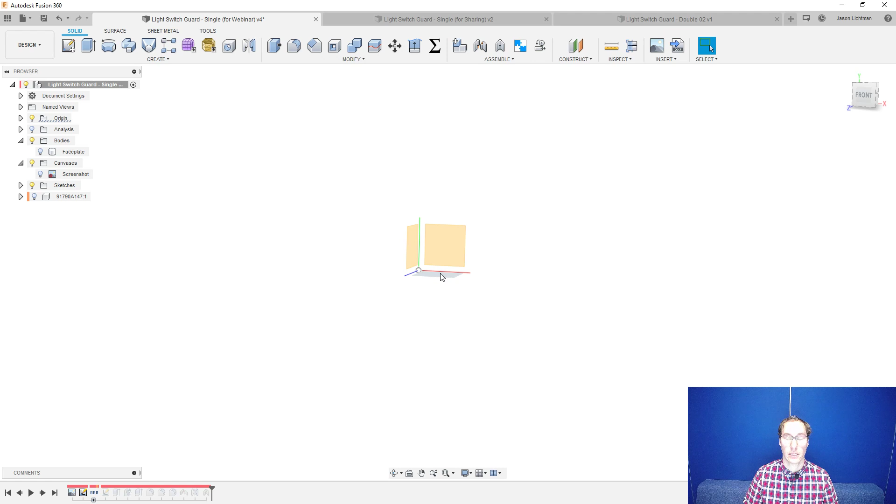We also here have planes. This one is the XY plane or the front plane. This one here is the YZ plane or the right plane. And this one here is the XZ or the top plane. We're going to go and pick one. In this case, I'm going to choose the front plane or that XY plane. I left click to select it and right click to create a new sketch.

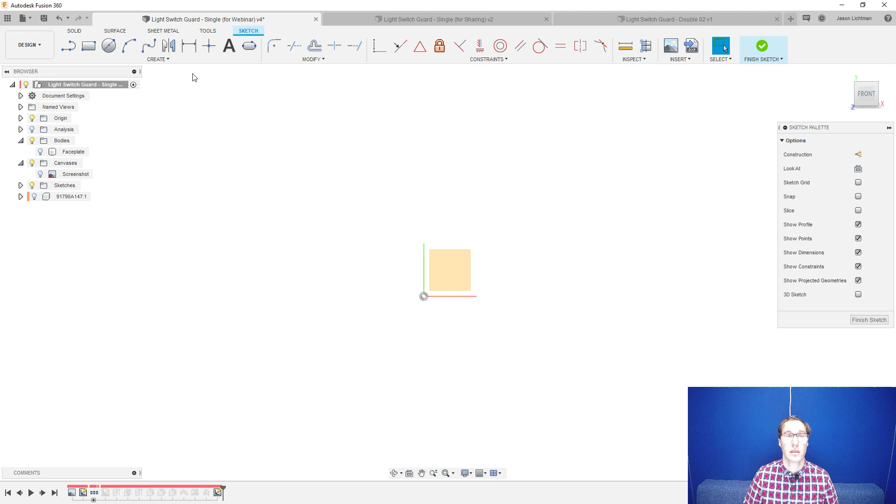Now that I'm in the sketch, I could see the sketch palette on the right-hand side, and I could see that I'm in the sketch tab up top. By the way, if you don't see this set of tabs like I see, keep in mind that you're probably not using the new user interface.

To turn on the new user interface, go to your preferences, under your name, Preferences, and the very bottom tab is going to say Preview, and turn on the UI Preview. After you restart Fusion 360, you should see what I see. I'm going to go and grab some different geometry to start with.

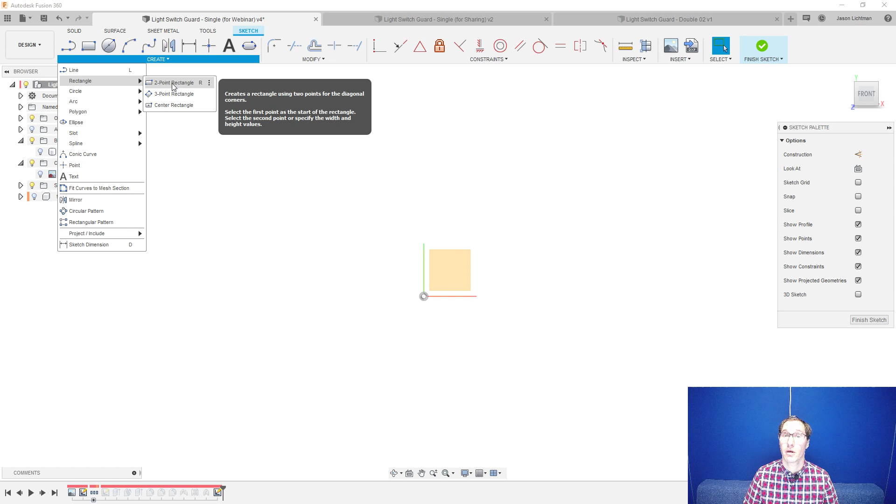Under Create, you could see that I could draw lines and rectangles and circles and arcs and a whole bunch of different shapes. In this case, we're going to start with a rectangle. I'm going to choose a 2-point rectangle. And if you're not familiar, the difference between the different rectangles are simply how you draw them. They're all just rectangles. I'm going to go and choose a 2-point rectangle and draw a quick rectangle.

I like to add center lines so I can make sure that everything is symmetric. So I'm going to go to Create, Line, and I'm going to draw a line from the origin up to the very center of the horizontal top line. And you'll notice that when I put my mouse near the very center, a blue triangle shows up. And that blue triangle is showing me that if I click here, it's going to add a constraint. And that constraint is going to be the same constraint I see up here called midpoint. It's going to lock into the center of that line.

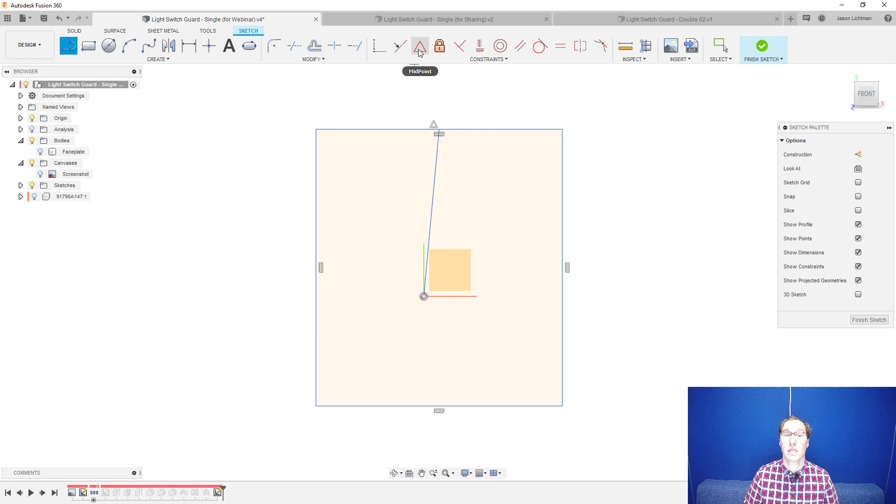Let's go and do that again. I'm going to click the origin, and this time the very center of the right vertical line. And now we're going to go and add some more constraints to be able to make sure that everything is lined up correctly. I'm going to add a horizontal or vertical constraint to this line to make it vertical, and this one to make it horizontal. And now everything snaps and is centered. In fact, if I go and I grab my square, you'll see here that everything I do at this point is going to be symmetrical.

Now, if I hover my mouse over that square, you'll see that it breaks it up into two sections, the upper right quadrant and then the rest. And the reason is because this vertical line here and this horizontal line are breaking up my section. And in this case, I don't want it to do that. And for that, all I have to do is convert these lines into something called construction. And you'll see that right here in the sketch palette on the right-hand side under construction.

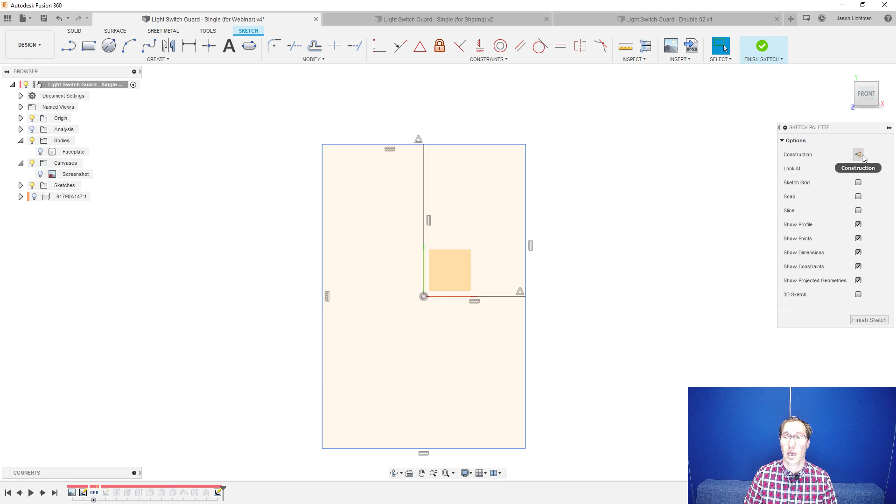So if I select that option and choose these different lines, it'll turn them into dotted lines that represent construction. And now when I move my mouse over this square, it's going to highlight the entire square and not separate it into two different sections. This is exactly what I wanted.

Let's go and do this one more time. We're going to create one more rectangle. This time I'm going to use a shortcut. The default shortcut for a rectangle is a letter R for rectangle. Very intuitive. We're going to click R for rectangle and draw another rectangle here. And this time, it actually made it into construction geometry automatically. I can actually double click on this rectangle, hit construction, and put it back into regular geometry.

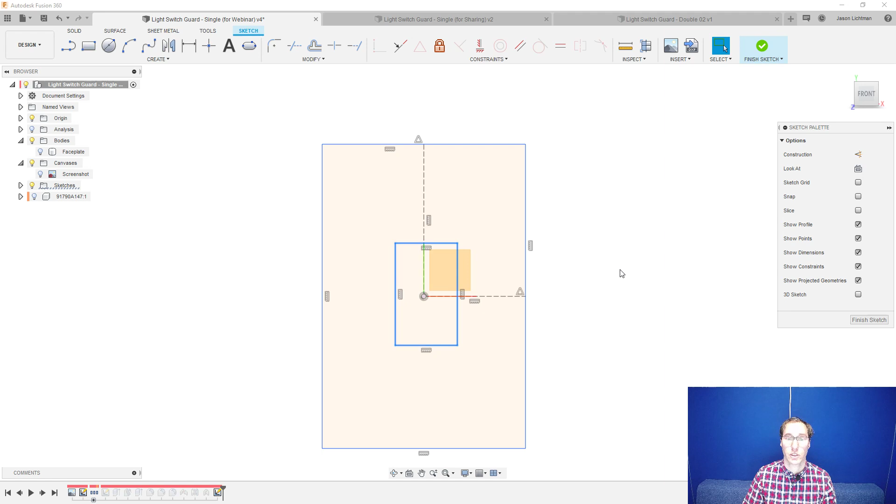That's what I wanted. Let's go and put some dimensions on this so far. We're going to go with a horizontal dimension of 79.75. And that's what I measured my actual light switch cover to be. We're going to also add a vertical dimension, and this one's going to be 116.75. Perfect.

And you'll notice that my rectangle went from blue colored to black, and the reason is because at this point I added enough dimensions and enough constraints to fully define the rectangle. The software doesn't have to think about, did I want this or did I want that? It knows exactly what I wanted because I fully defined it. That's the fancy word we use for it.

I'm going to do the same thing for the smaller rectangle. We'll go and add a dimension. Maybe we'll start with a vertical. This is going to be 24.75. And we'll also add a horizontal. This one is going to be 11 millimeters.

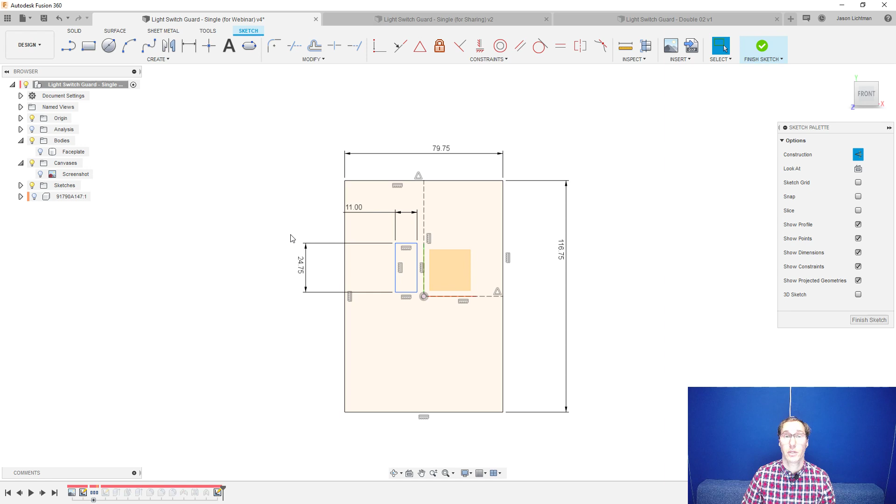And you'll notice that the rectangle, even though I put the dimensions on, is still blue. And it's because I didn't yet define everything about it. In this case, I didn't define the position. So I can go and move this rectangle wherever I'd like, including approximately in the middle here. And then we'll go and add another constraint to fully define it.

And this one we're going to use is called symmetry or symmetric. Under constraints, I can choose symmetry. And in this case, the order that you click very much matters. So let's go and make sure we get it in the right order. We're going to go and select any of the lines that I want to make symmetric, then the second one, and lastly, the line that's going to be in the center.

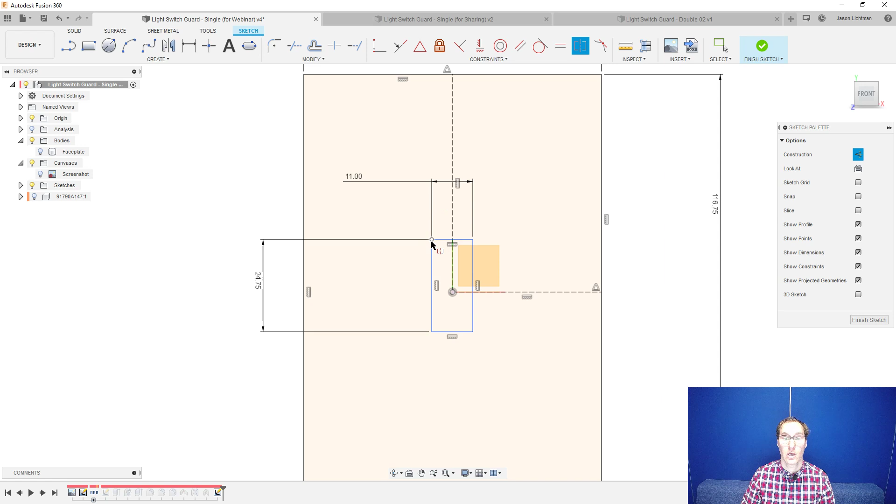So let's go and choose the left vertical, the right vertical, and then the center line. And off it went, and it not only snapped into place, but it also turned it black for fully defined. Let's go do this again for the horizontal, and now that's snapped as well.

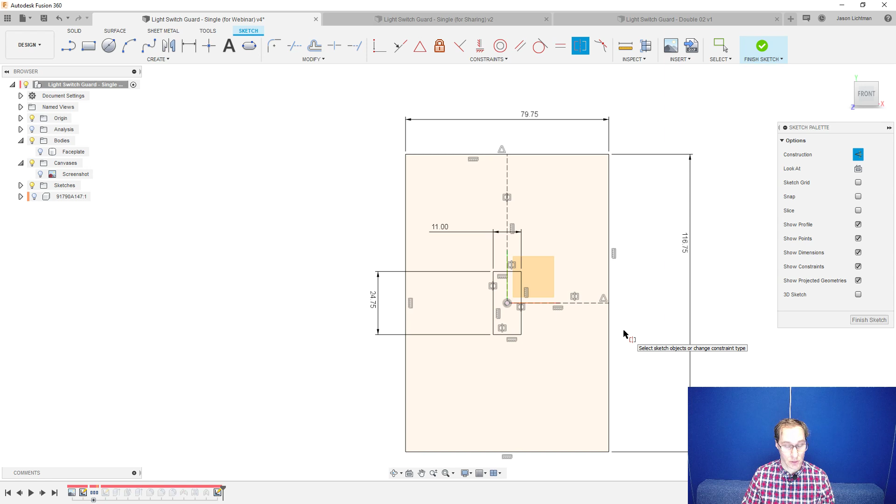There's only one more thing that I need here, and that's going to be the location of the screw holes, because I'm going to want my 3D printed part to fit with those same screws. So let's go and put those. For circles, we can use a shortcut C for circle, very intuitive, just like before. And I can go and draw a circle here, and we'll make that not construction. And then I'll go and add one more circle down below.

And actually, another thing I could do that'll make my life easier, let's go and delete this bottom circle, is I could actually go in and say create mirror, and I could choose an object that I want to mirror, and it'll automatically draw it and apply a symmetry constraint. So that's a little bit of a shortcut for any of you beginners out there. We're going to choose the object is going to be the circle, and then the mirror line is going to be this horizontal line, and we're going to say OK.

And as a result of applying that mirror command, now if I move the topmost circle, it'll move the bottom. And also if I change the size, it'll also change the bottom. So that's perfect. We're going to do that one more time. I'm going to draw another circle up top. We'll go and add my symmetry and mirror that as well. And now we're looking really good.

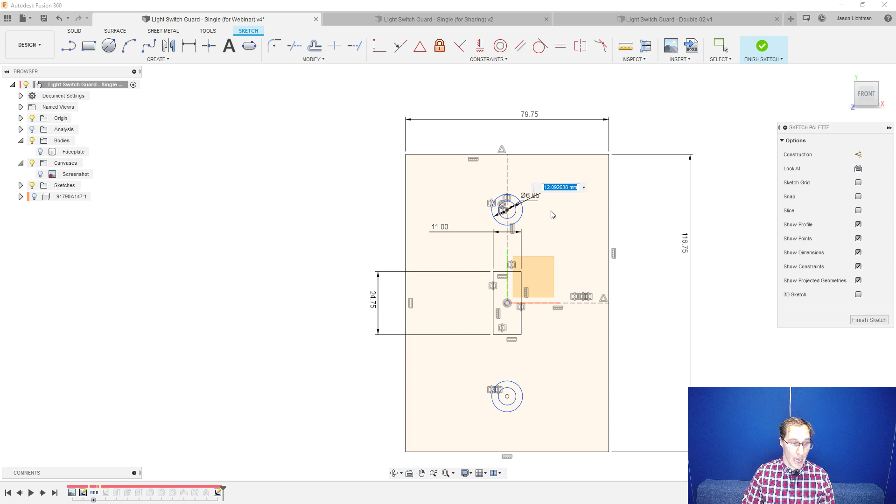Let's go and put some dimensions. We're going to make one of these, the bigger one, 6.85 millimeters, again from measuring my actual faceplate. And then the smaller is going to be a hole that's 4.25 millimeters. The only thing left to fully define this sketch and be able to move on to the next part of our design process is to make sure that I get the dimension between the holes correct. In this case, it's really simple. It's only 60 millimeters. So go and add that, type in 60, and now I'm good to go.

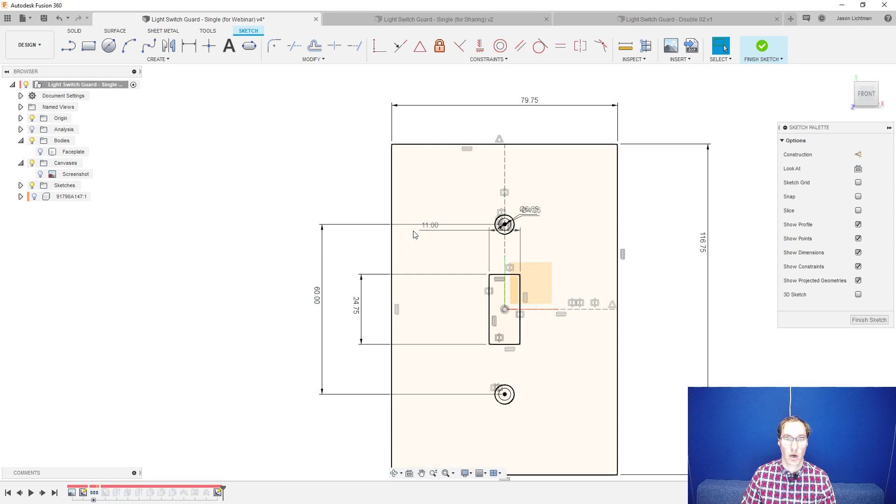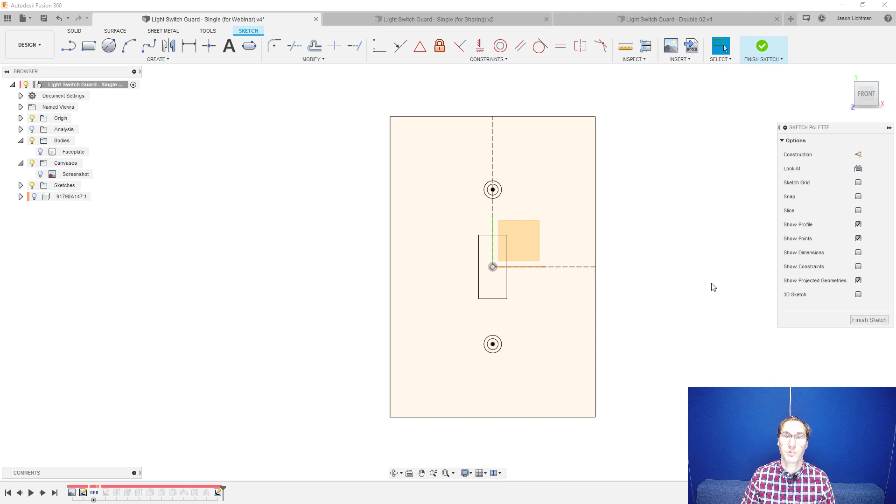If I move my dimensions out of the way or even hide the dimensions, now you can see exactly what I'd expect. And by the way, you can hide your dimensions and you can also hide your constraints. Both of the showing and hiding dimensions is actually new as of our update about a month ago, maybe 6 weeks ago, and the show constraints has been around for a little while, but now I'm seeing everything and it's looking really, really good. So let's move on to the next part where we design the actual guard. So we're going to go and finish this sketch, and we're going to go and create a new sketch on the same front plane, and now we'll go and design the really fun stuff.

To start off, we're going to want to go and project some geometry from the original sketch. And if you're not familiar with that term, let me just define it for you. The sketch that we created was sketch number 1. We're creating now sketch number 2. And although I can see sketch number 1 in the background, if I want to use geometry from that sketch, I do need to project it so that sketch number 2 looks at sketch number 1 for that particular geometry. And if I ever change sketch number 1, the geometry shown as projected in the second sketch will also update.

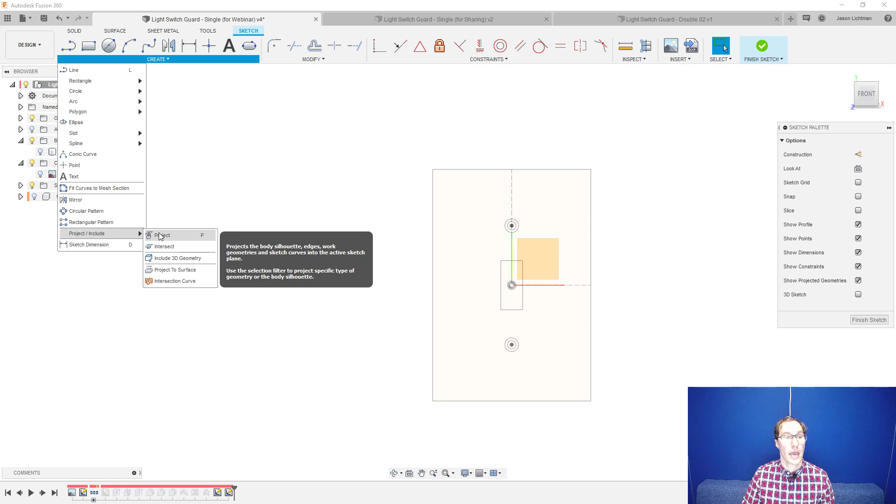For that, I can go to Create, Project, and then choose the Project feature, or I could just hit P for Project. I'm going to go and choose the larger of the two holes, the two circles, and say OK, and now we're good to go.

In fact, if I go and I hide that original sketch, you'll see at this point all I see are the two circles, the two projected circles, and they're magenta because they're projected. That makes it a little easier for me to see that they're projected. And so at this point, if I want to use the other sketch to keep it in the background, I can, but I don't need to.

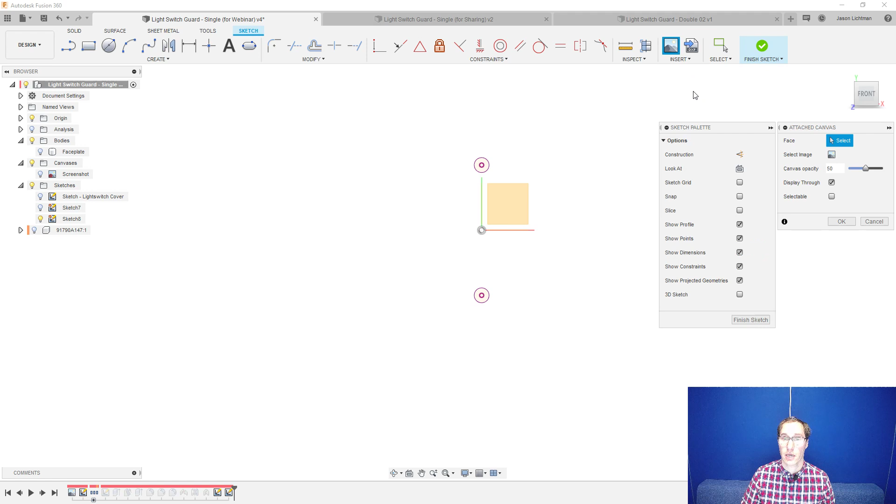It's really my choice. Also, what I could do to help me out is I could bring in an image, and we call those attached canvases. So let's go and bring in an attached canvas, and then we'll use that to trace our design to make it a little bit easier for us. So I'm going to go under Insert, an attached canvas. I'm going to choose the plane that I want to bring it in at, and I'm going to go and select the image itself from my computer.

We're going to go to the folder that I have ready to go, choose the screenshot, and as you can see, the image is not exactly the correct size. But we can fix that very easily here in Fusion. We're going to go and choose this screenshot on the left-hand side, under Canvases, and we can right-click and we could say, let's calibrate this image.

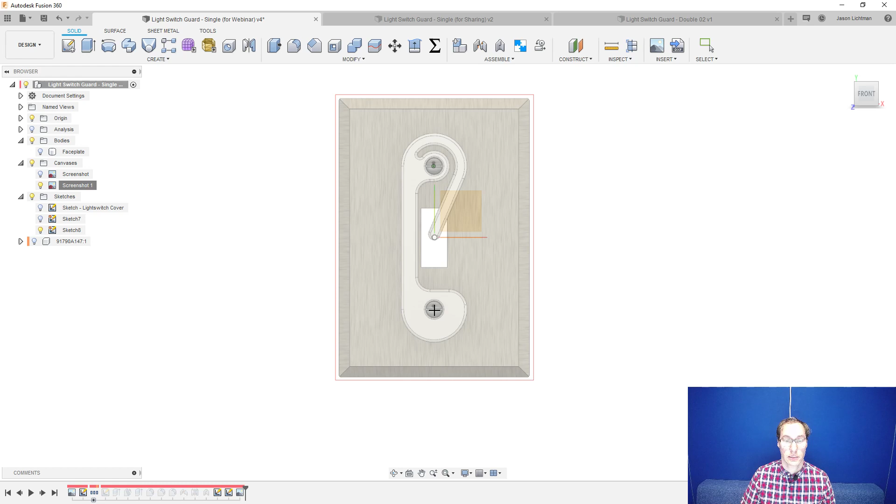And if you're not familiar with calibration, what we're going to do here is we could pick any 2 points on this image, and it'll allow us to override the dimension to whatever we want. So if we know already that the center of this screw hole to the center of this one is 60 millimeters, all I have to do is type in 60, and it'll automatically scale the image to the right size. And that's perfect. That's really helpful.

Now I can go and reposition this if I need to, but it already happens to be centered, so my life is a little bit easier. But if I did want to go and recenter it, I would right-click on the image, Edit Canvas, and then using these manipulators, manipulators is what I meant.

Got to make sure to put the right emphasis on the right syllable.

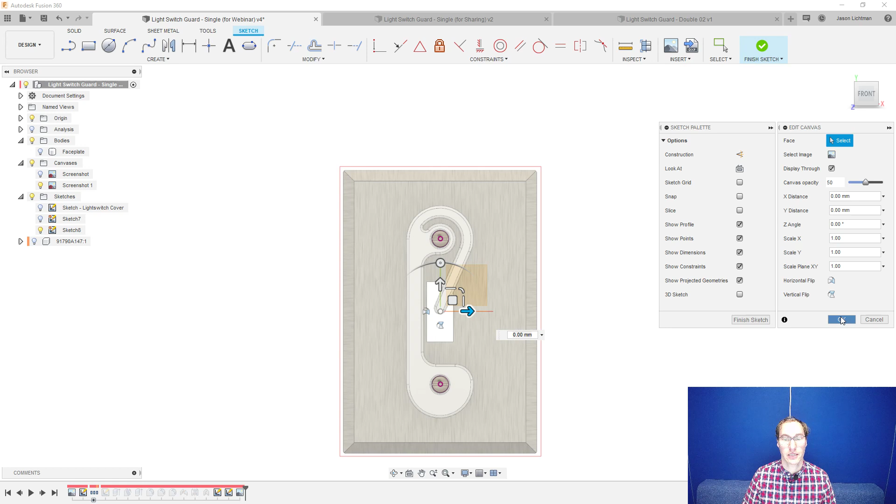But if I go and I orient this the way I want, then I'm set up and ready to go. So here I am. It's all set up. Let's go and draw. Now, we're going to go and reorder things just a little bit. I'm going to reorder my canvas slightly. And now when I go and I draw my sketch, I can actually see the canvas in the background. That'll make things easier for me.

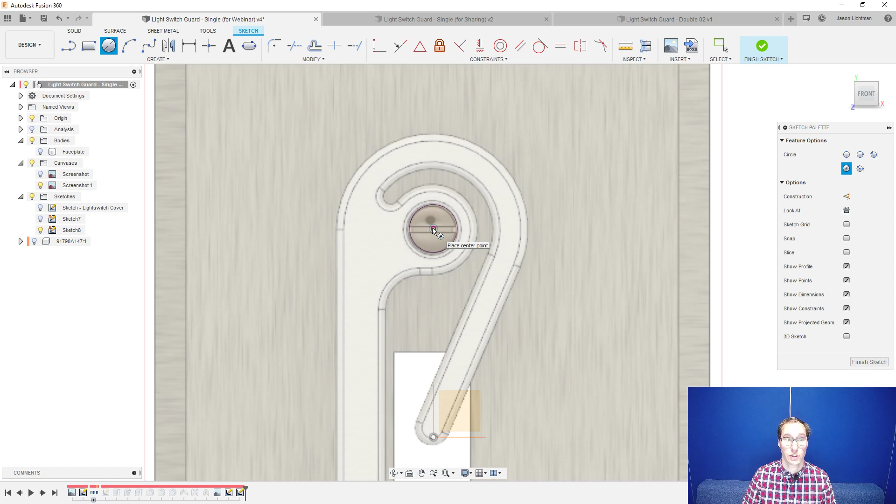Let's go and add some circles, because if I zoom in here, you could see that the majority of this design is actually circular. So I'm going to hit C for circle, click on the very center of the projected geometry, and I'm going to draw a circle approximately here. The exact dimension doesn't matter for now. We're going to go and do that again, and we're going to go and do that again.

Now I can go and put dimensions on this to be exactly what I want. So for example, if I want the thickness of this region from here to here to be, let's say 3 millimeters, we'll go and override that number, and it's looking good. Maybe I also want to define the thickness of the actual arm that's going to be bending. And keep in mind that this number is actually very important. This is going to define the flexibility of your part.

This is actually one of about 5 different things that'll all define the flexibility. And I will make sure at the end of this particular webinar, I'll cover what all 5 of those different variables are and how you could change them to suit your particular needs. But for now, this is one of them, and we're going to go and dimension between them, and I'm going to set this to be 5 millimeters.

Now at this point, my circles are still blue, they're not fully defined, and I can go and stretch this wherever I want, and as I do that, it's going to maintain 5 millimeters from this circle to this one, and maintain 3 from this to this one.

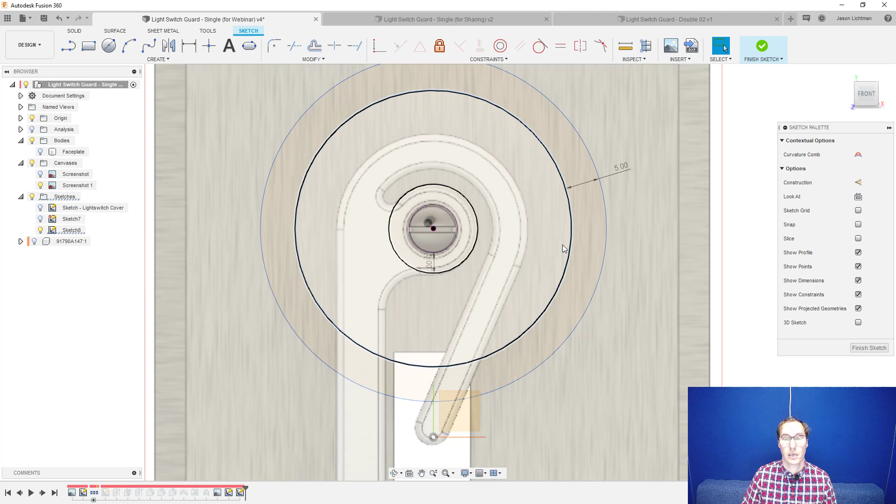In fact though, this one, the smaller, is fully black because it's fully defined, because we know where the screw hole is, we know what the offset is, it knows everything that it needs. But this outer one hasn't been defined yet, so we're going to go and drag this in to get this to be where we want, or we can go and put a dimension on it.

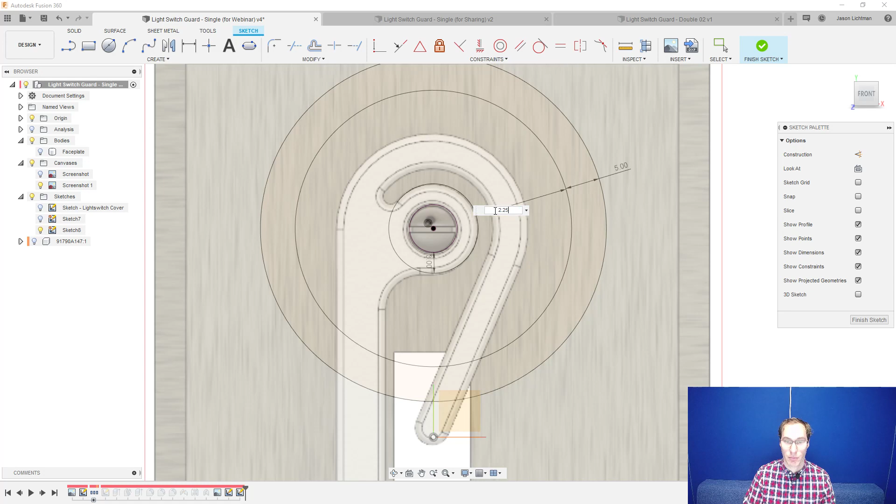And there are a variety of different ways I could put the dimension on, and one of those ways is I could define the outer size, and I could set that to, let's say, 27.5, and that'll match up how I want it. Or if I want, let's go and undo that. I'll go and delete this dimension. I could also set the dimension between this, like what's this gap over here, and I can make that gap as big or as small as I want and get the same result.

Once a sketch is fully defined, like you see here in these circles, if you add another dimension, like the outside, once I already defined it via the inside, you're going to get a warning like you see on the screen right now. And that warning is telling you that adding the dimension will over-constrain the sketch. And if you choose OK, it's going to create a driven dimension. And so what I want you to think about in this case is a driver and a passenger in a car. You can only have one person driving the car.

Backseat drivers not allowed in my household.

So in this case, you have the driver being the dimensions we've already defined, and we're going to allow this dimension to be a passenger. And we denote that with parentheses around the number. And if I want, I can actually change which of these dimensions is the driver and which one is the passenger. To do that, you need to take the driver and demote the driver to be a passenger. Let's go and do that.

I'm going to take this 2.25, right-click on it, and toggle it to driven, which is now making it a passenger. The sketch turns blue again because now I can actually drag my sketch and change the size if I want, and it will update both of these driven dimensions because both of them are the passenger.

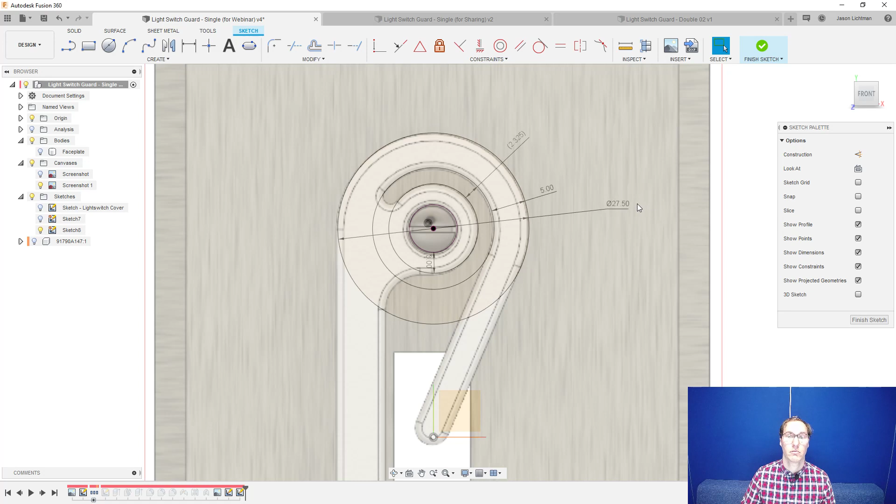But I can also promote one of the driven dimensions, whichever one I want, to now become the driver by toggling it to driving. And now the parentheses go away and I could change the value to whatever I'd like, including, let's say, 27.5. That's looking pretty good. We'll go and look at that a little bit more in just a moment.

Let's go and start to define what it's going to look like connecting the top area to the bottom. For that, we're going to go and draw a line, and I'm going to use the shortcut L for line, and I'm going to go and draw a line starting on this outer circle, and you'll notice here that if I select right now, there's a blue icon just at the start of this line that'll automatically make this line tangent to the circle. If I move this away, it's not going to do that. I could choose to do it later if I'd like.

So depending on where you drag the line, it's going to add constraints. If I add it where I have it right now, it's going to add a vertical constraint. And if I add it around here, it'll add a tangent constraint. There is no right and there is no wrong. Both are right. You can choose whichever one you want. There is no problem either way. So let's go and use maybe a vertical.

And then you'll see that this line is still blue because I can still drag this and move this over. But we can go and add more constraints. And so under constraint, you'll see one that we haven't used yet called tangent. You'll see that right here. I could choose this line and this arc, and it'll snap it to the closest available tangent location. That's off on the left. And now you could see that this line turned black because it's fully defined, except the endpoint, because I could still drag this and make this longer. It's looking pretty good so far.

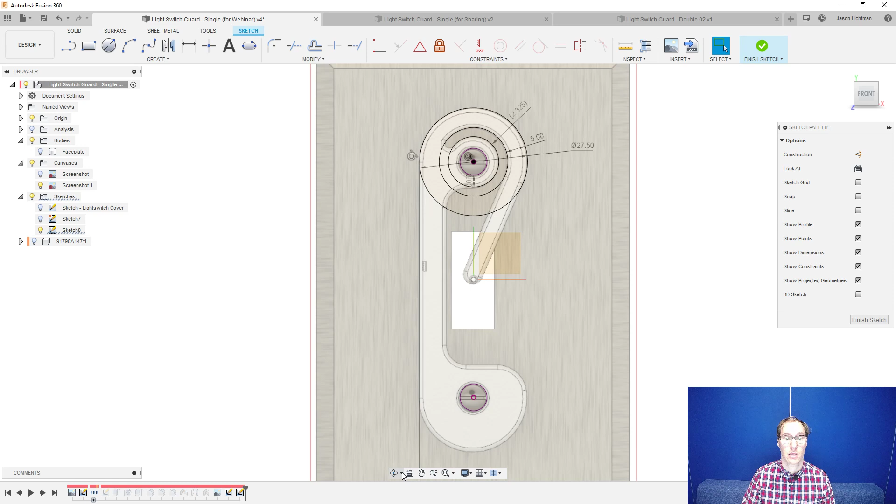Let's go and draw another circle down here at the bottom. We'll use the very center of our screw, and drag this out. And I could set the dimension to this circle and make it match 27.5. But I run the risk, of course, if I change the dimension up top from 27.5 to, let's say, 30, the bottom one doesn't adjust. So there are a couple of ways I can go about fixing that.

Let's go and undo that, and we'll undo our dimension down below. Here, what I could do is I could double click the dimension, and instead of typing in a value, I could actually click on the dimension up top, the diameter of that circle. And now this dimension is going to look at D126, which happens to be this dimension. And so if I change the top value from 27.5 to, let's say, 30, the bottom one is going to adjust automatically. So that's one really convenient way to make the match.

But one of the cool things I think about sketching is that it brings me way back to the days that I was in geometry class. And the reason is because all of 2D sketching is a collection of geometric shapes, and how they interact with each other, those constraints, are based on geometric rules. And so if you're good at it, or practice to become good at it, you'll start to see patterns and different ways that you can constrain things to get the results that you want.

And at the end of the day, there are multiple ways you can get to that end result. It's your choice on how you want to get there. So if you want to make the bottom circle match the top circle by having the dimensions match, perfectly fine. If you would like to make them match in another way, then that's also perfectly fine. Let's go and take a look at this together. One moment, there we are.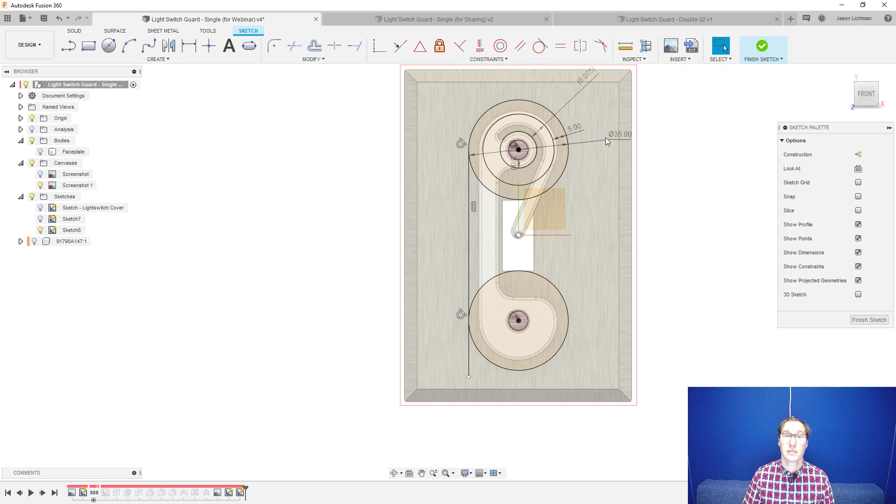Here you can see I'm going to go and delete this dimension entirely. This blue circle is free to move, but I can also go and add that tangent constraint that we talked about. And now it's automatically going to match that circle. So just like before, if I change this value from 30 to maybe 35, the bottom circle is going to adjust automatically. So there are multiple ways you can make this set of geometry match each other. Let's go and set this back to the correct number. That was 27.5, and we're good to go.

Now if I zoom in here, you'll see that I have a little bit of an extra piece of my line. The line's a little bit too long. Well, instead of using a constraint, although I could use the coincident constraint and select the end point of this line and this circle, and it will automatically constrain it to match. The other thing I could do, if I undo that for a moment here, is I can go under Modify, Trim, and trim is really neat because it'll do exactly what you'd think. It's going to trim my geometry.

I can select, just by clicking with a left mouse click on this geometry, to automatically trim it to the next available intersection between the different geometries. Or if I would like to do this a little faster, I could also drag my mouse. I'm clicking with my left mouse and I'm dragging it, and anything that I select over will automatically trim as well. So keep that in mind. There are two ways to trim. Let's continue. So this was supposed to be 27.5. It looks like I undid just a little bit too much earlier.

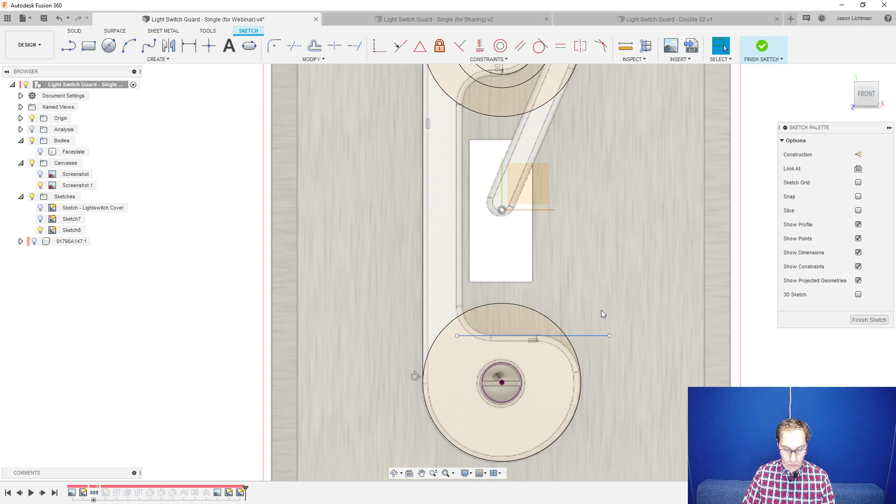And let's go and add some more geometry. I'm going to hit L for line, and I'm going to draw a horizontal line. I'm going to put this approximately here. And then I'm also going to draw another line. This one's going to be vertical. And one thing to note: I love Fusion, but not every single thing that it does is something that I'm going to fall in love with. If I try to draw this line vertical right now, it's adding a constraint that is the perpendicular constraint. And that's not always what I want.

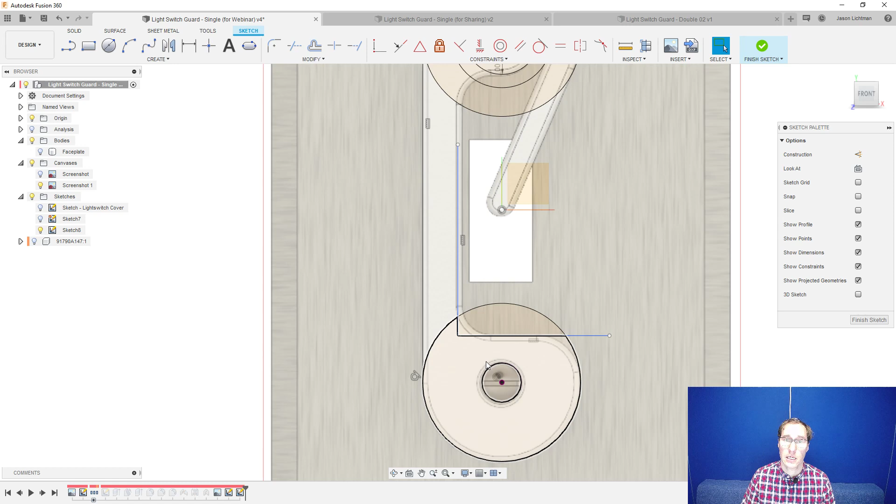So what I often do is I can avoid constraints from being added while I'm drawing my sketch by holding the Control key on my keyboard. And now I could draw this line wherever I'd like, even almost vertical, and then go ahead and add the constraint that I want, like this vertical constraint. So that's a way that you can avoid constraints if you don't want them. Just to repeat, it's holding Control while you're adding your geometry. Now I can see here, if I zoom in, I have some extra part of my circle that I don't want.

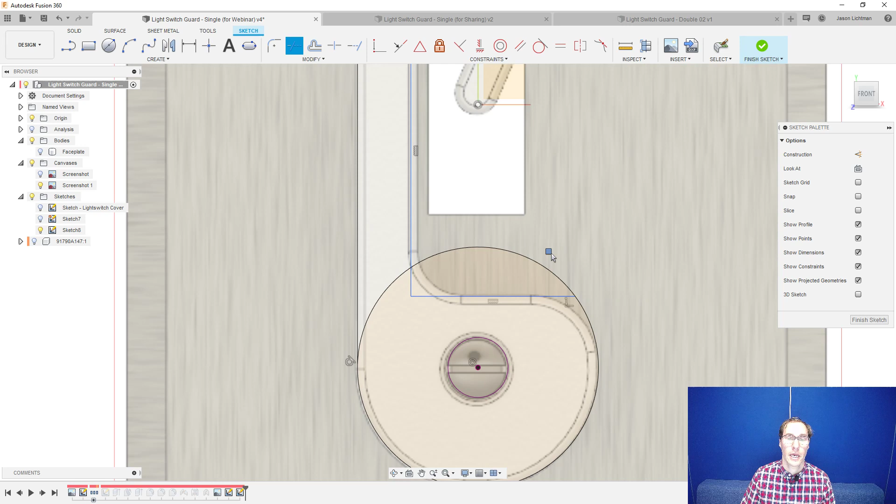So let's go back to our trim command. T for trim is the keyboard shortcut by default. And we're going to take advantage of the method where I click and drag. So I'm going to click with my mouse, and anything that I hover over is automatically going to trim, just like that. And I'm also going to take advantage of clicking once to trim what I want, and we'll click right here, and the red preview is showing you what to expect when you click. So there we go. So we're pretty trimmed out right there.

Let's go and add a dimension, and I want that dimension to be from this circle here to this line. And I'm going to show you what happens if you go to dimension this the way that you'd expect. You might not get exactly the results you want. So I'm going to hit D for dimension. I'm going to click on the circle and this line. And what I get here is a dimension between the center of the circle and the line. But that's not exactly what I wanted. What I want is a dimension between the top of the circle and the line.

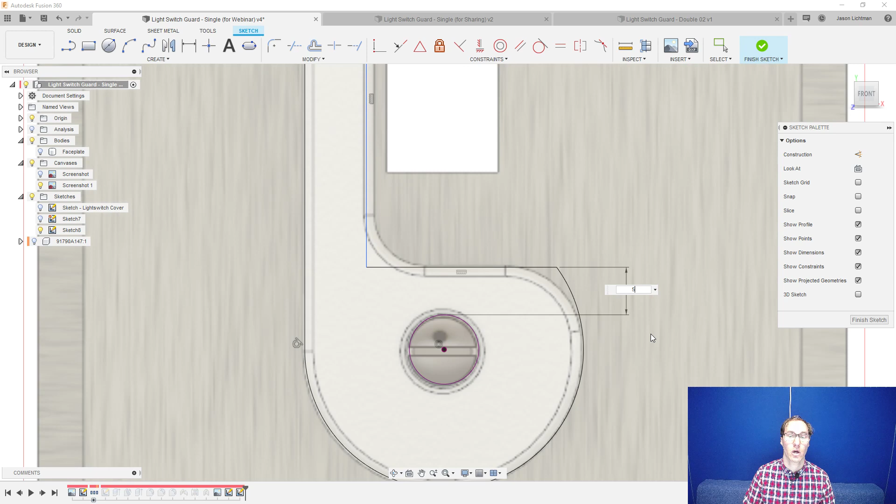And for that, I'm going to hit D for dimension. But this time, before I click on any of the geometry, I'm going to right-click, and I have an option here. The default is to pick the circle or arc center, but I can override that and pick the circle or arc tangent. So in this case, when I pick this circle, and then I click on this line, it's going to give me the dimension between the top of the circle and that line, and I'll override that to 5 millimeters.

I can also take this blue line. You'll see that this one is free to move as well. It's not constrained yet. We'll add a dimension between this line and this one, and we'll make that about 7 millimeters. Perfect.

And I'm noticing that I have some sharp edges down here below, so let's add a fillet. Under Modify, I can find the Fillet command. I can choose this corner by choosing the actual corner, or I could choose 2 lines and it'll automatically fillet it. And then I can drag the blue manipulator wherever I think is going to be ideal, including maybe also choosing to override the number, and I could make that 5 millimeters. Quick and easy.

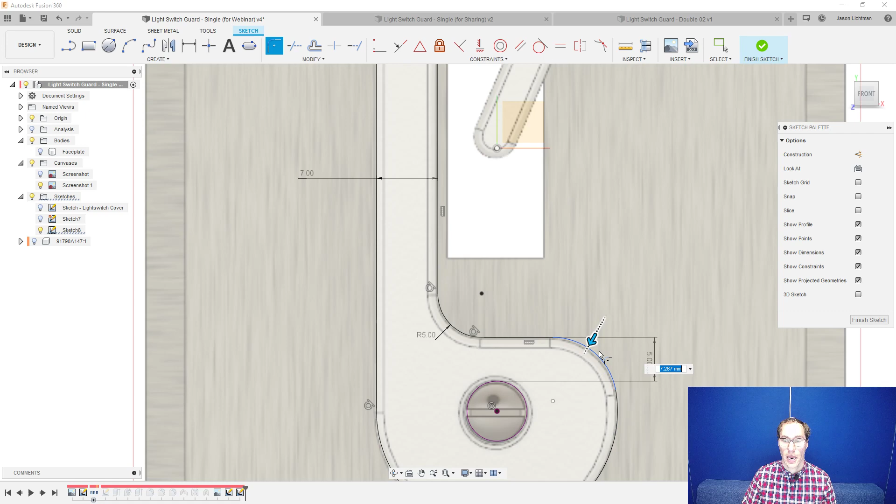I'm also going to do a fillet right here in this corner. And I'm going to drag that down. And this one is going to be about 7.5. And that's looking good and also fully constrained. Let's go over here and start to define some of the more specific details. But overall, this is looking really good so far.

So let's continue. We're going to take this line and I'm going to drag this up quite a bit. And then we're going to want to connect this line to this circle right here. And we're going to want to do that with a horizontal line in this case. So I hit L for line. I'm going to click near the bottom of this particular circle, and it's going to allow me to draw a horizontal line. Excuse me a moment.

You'll see here that it's automatically adding the constraint that I don't want. So I'm going to hold Control and then select, and then we'll add the constraint that I do want, which is the horizontal constraint. Now, I could use trim to trim out these lines and make them match, but this is a great example of where I think constraints are actually quicker and easier than the trim tool.

So I'm going to select this endpoint. I'm going to hold Control and hit this endpoint, and then now I'm going to hit coincident, and they'll automatically coincide with each other. But I see that this blue line is still blue, and I expected it to be black. Let's go see why it isn't.

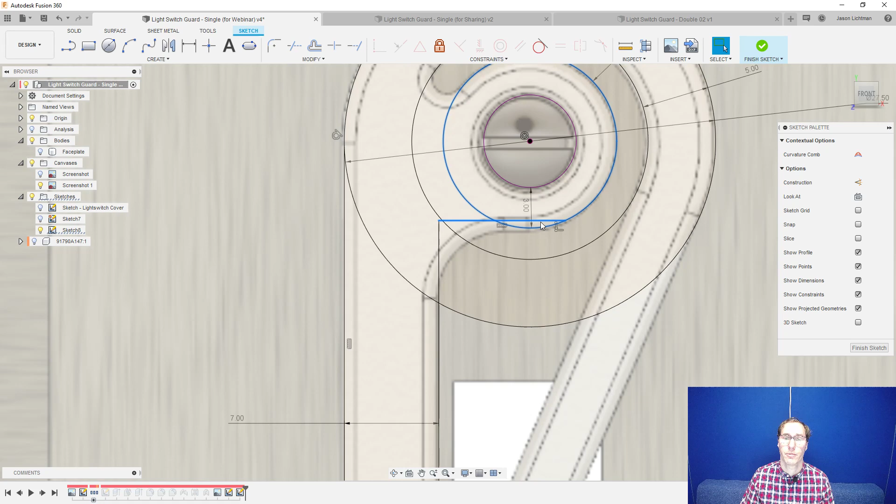I can select this line and drag it, and start to see that I don't have tangency between this circle and this line, but I can fix that again by selecting both, holding Control in the middle, and then clicking tangent to apply that constraint. So nice and easy. Let's add a fillet here as well. Choose the corner.

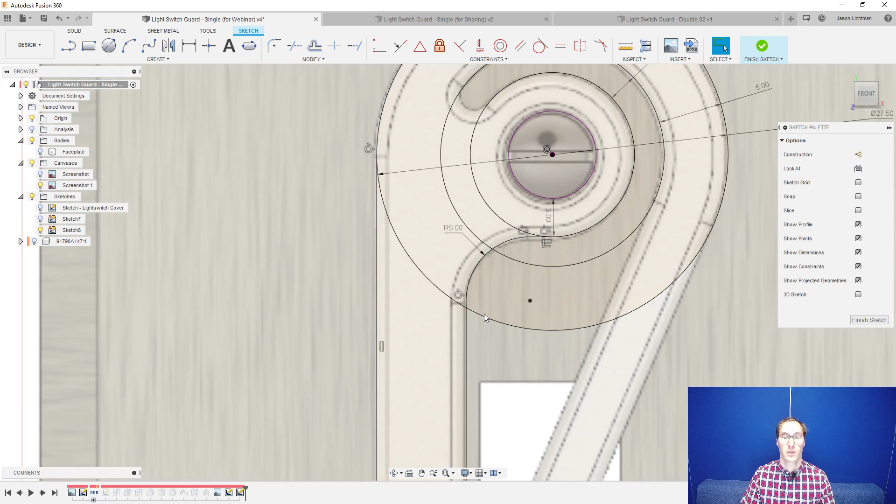Oh, and by the way, we do have a trick that we're going to show you in just a few moments with fillet that I think you're going to like. I learned it from Brad Tallis just 2 weeks ago, and you'll see that in just a second. So here I have my fillet, and everything is looking good. We're only missing 2 things, and we'll go and turn this into 3D.

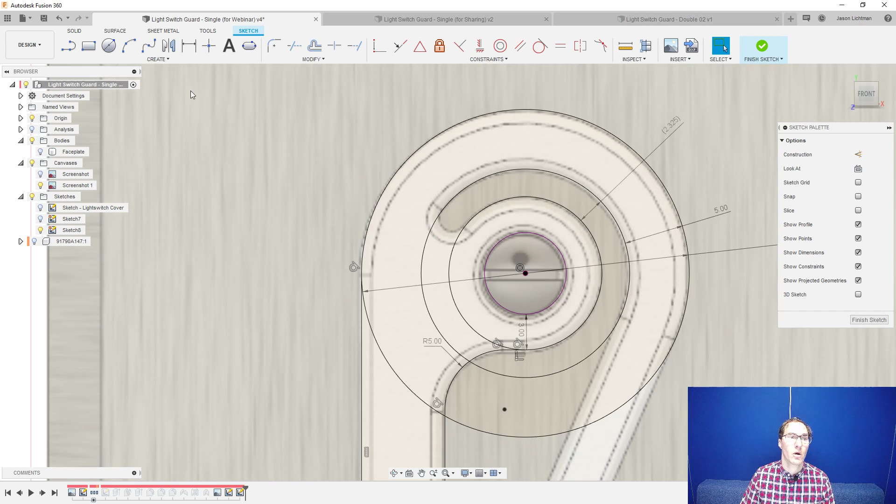The 2 things we're missing are the arm itself and how that comes down, and then of course how this piece right over here connects. Let's go and maybe do this piece where it connects first. I'm going to go and create an arc in this case, maybe a 3-point arc. I get to pick this particular circle here, another on this circle, and then depending on how I drag this particular arc, you'll be able to see tangency start to show up.

In this case, I'm not seeing any constraints showing up automatically, so we'll go and just add that ourselves. I choose tangent between this arc and this one, between this one and this one, and now everything in terms of the size is set up, but the position is now fair game. I can go and put this into place and put a dimension, but the way that I would like to define this in this case is we're going to go and put an angle.

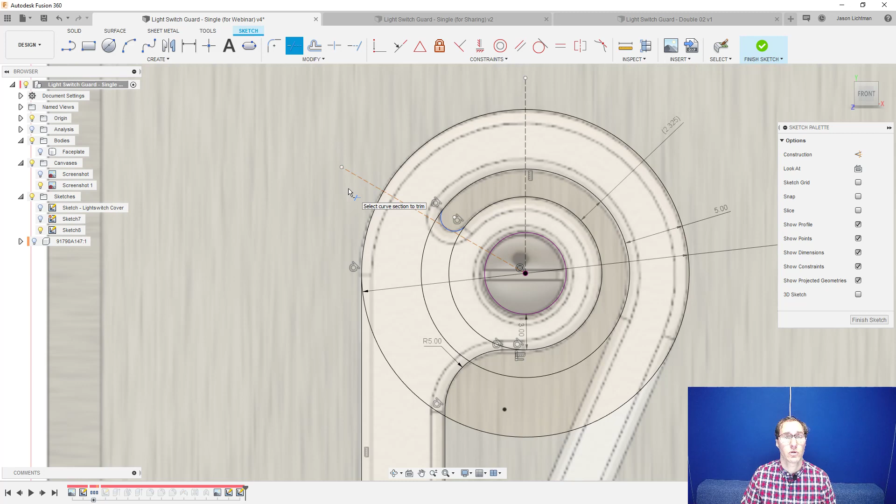So I'm going to go and draw a vertical line straight up, make that construction. I did it by choosing the letter X on my keyboard. That was my shortcut to turn it into construction. I'm going to draw another line across over in this direction, make that construction as well. We'll go and use that fancy trim tool where we can drag right through and trim our lines. And then I'm going to go and add tangency between this arc and this line.

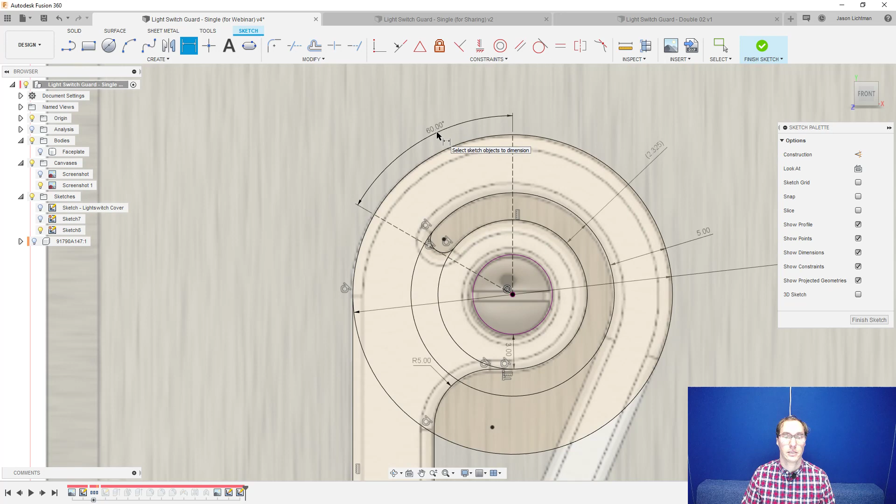Now, all I have to do is drag the line and it automatically drags the arc. That's, as I was talking about earlier, about being able to use geometry for your benefit. That's all I was doing there. Nothing fancy. Now we'll go and add a dimension between this line and this one, and we'll set it to exactly 60 degrees. And of course, that arc now is black. It's fully defined and good to go.

Let's go and add some geometry for the arm, and then we should be able to extrude this. I'm going to draw a line from about here to this particular circle. We'll go and draw one from about here to this particular circle, and we're going to go and add some more of our constraints. We're going to use the famous tangent constraint we're using a lot today. We'll make a tangent between this blue line here and this circle, the same between these two.

And then lastly, at this point you could see that I could move these independently of one another, and I actually want them to be parallel. So let's go and add another constraint. We'll choose the parallel constraint between this blue line and this one. Now when I drag this, they're going to move together. That's perfect. I could try to put a dimension here between those two lines, but I actually don't have to, because this dimension, the 5 millimeters over there, is automatically going to drive the dimension between these two.

And if you need proof of that, let's go and add a dimension. I told you earlier that if you try to add too many dimensions, we're going to give you a warning that we're going to make that dimension a driven dimension or a passenger dimension, and you'll see that warning right here when I select. Adding this dimension will over-constrain the sketch. It's already fully defined. Choose OK to create a driven dimension, and here you see that it matches the 5 millimeters over there.

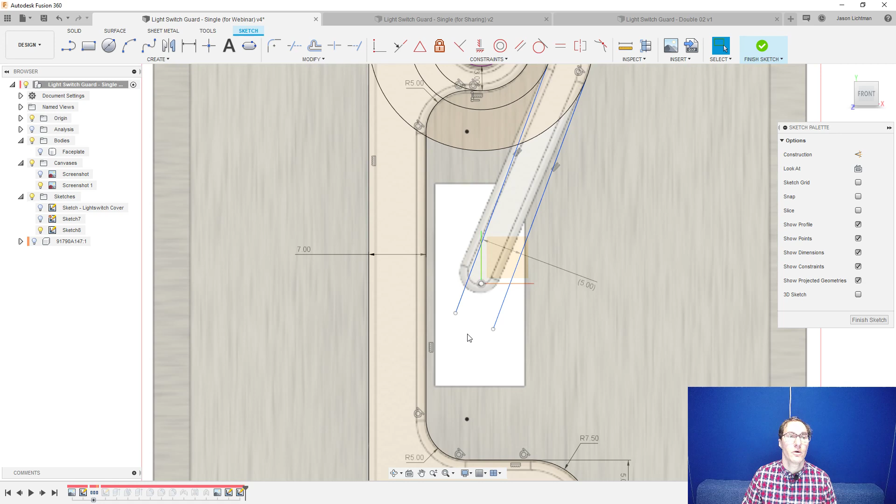In fact, I'll just prove it to you once more. If I change this from 5 to, let's say, 6, this one here is also going to change. Make it back. Perfect. So I have my shape here. The angle is not set at this point. I do want to focus on the end a little bit first, and then we'll focus on the angle. For the end, I'm going to create an arc, just like I did over in this region. We're going to create an arc from this endpoint to this one, and we're going to go and add tangency.

It automatically actually added tangency between this arc and this line. You could see that constraint right there. And I could also add it to the other side. Perfect. So now the actual size of the arc is defined, and all I have to do is to decide where I'm going to put this.

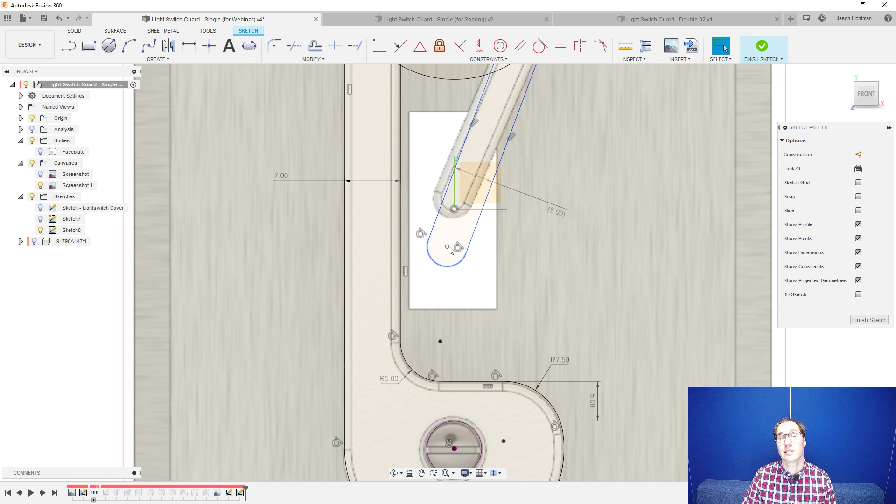And this is something you're going to have to do a little bit of trial and error on. In terms of the left to right, that should be pretty obvious. I want it centered. But in terms of up or down, that's going to be where your trial and error is going to lie. So let's put this in about the right spot. It's going to be somewhere up top over here, and I want it to be centered.

So I'm going to use a vertical constraint, which doesn't just have to apply to lines. It can also apply to circles relative to each other, arcs relative to each other, squares, whatever it is you'd like. So I'm going to choose the center of this particular arc, and then also the origin.

And now it's going to, not fully, mostly constrain it, so that I can move this particular thing up or down, but left to right is not possible anymore because it's automatically centered. This is going to make my life easier. What I could do at this point is I could add one more dimension.

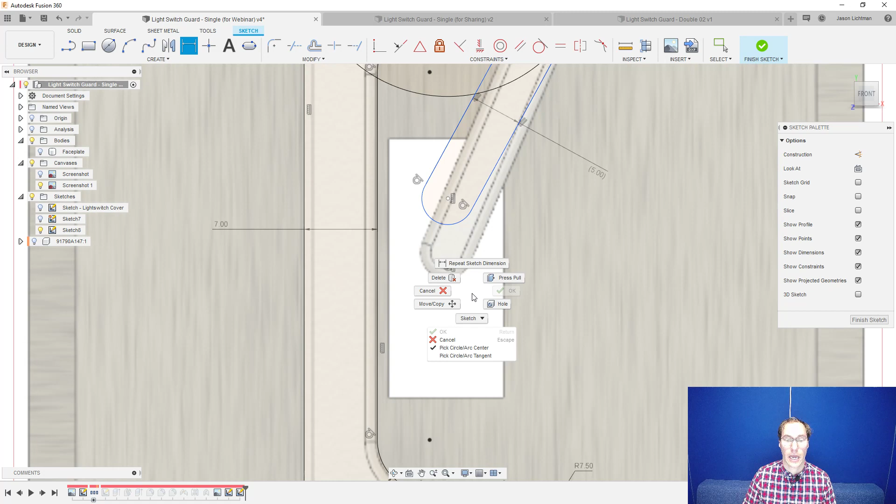I can choose D for dimension, but instead of choosing the origin to the center of the arc, we're going to right click again and choose to pick the circle or arc tangent. I pick the arc, I pick the origin, and it's going to put the distance between them. And I could set this to whatever value I'd like, whether it's 1 or 2 or 5, whatever it happens to be. And by the way, you're going to find here that you can't exactly put in a negative value.

And so if I decide after the fact that I actually want this to be down a little bit further past the center, a little trick for all of you out there, is I can right click on this dimension, make it a driven or a passenger dimension. It makes my entities blue, which means that I can drag them around at this point. I can now drag this dimension down.

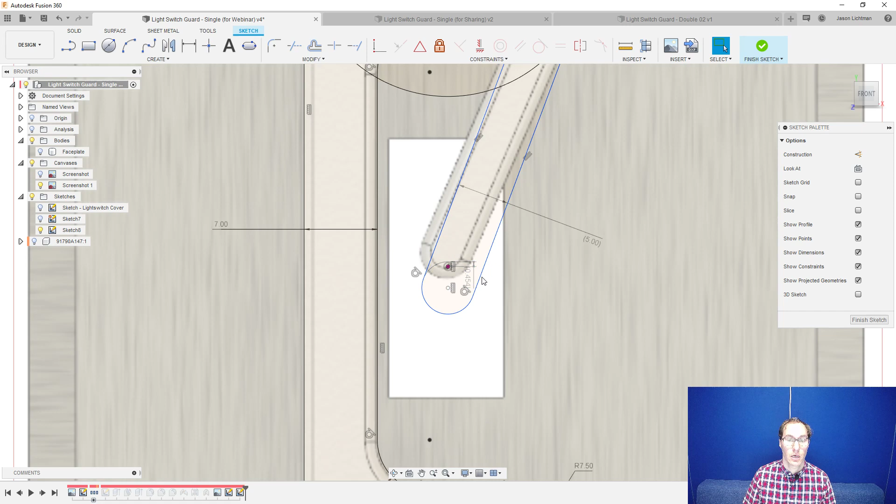Wherever I want it. And you can see that this dimension is now showing 0.454 millimeters in this direction. So instead of showing you a negative, it just shows you the magnitude of the dimension in whichever direction you go. So in this case, it'll be positive going down, and if I drag this up, it'll still be positive, but it'll be going up.

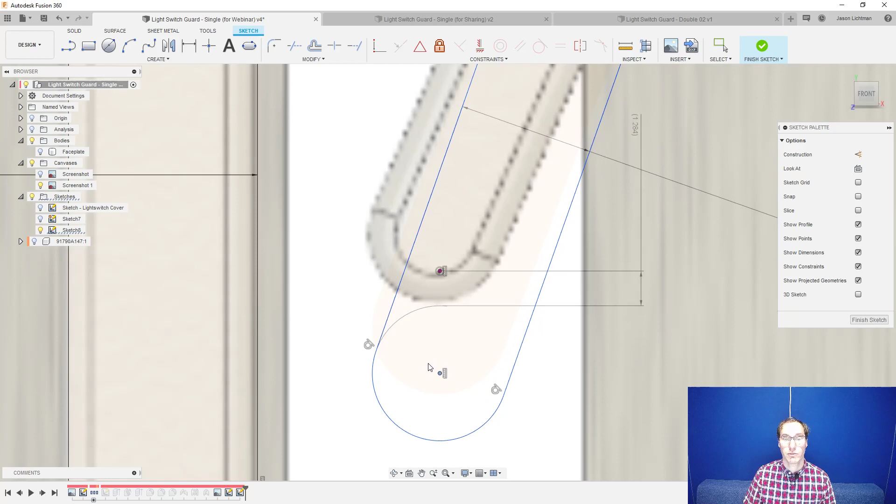So if I drag this down, I could then take my dimension, right-click, choose to make it driving. Now my sketches all turn black as I expected, but I could change this value to whatever I want, and now it's going to be the value below the center line, whatever that value happens to be for you.

Excellent. Another quick tip is you cannot make the value 0. So you could make it a very, very small number, like 0.00001, but you cannot make it 0. So just keep that in mind.

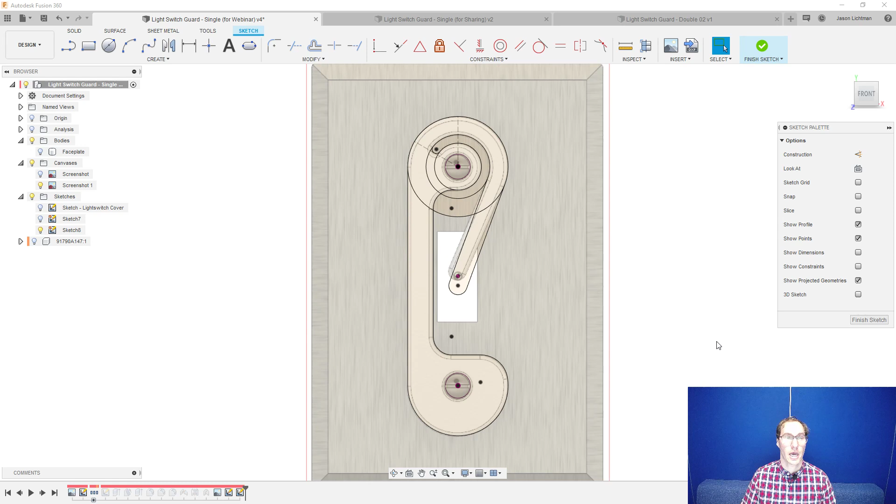So interestingly enough, if I look at this whole sketch, as messy as it might look, let's hide the dimensions and hide the constraints for a moment. As messy as this might look, this is actually good enough for me to turn into our 3D geometry. I don't actually have to clean this up. And to illustrate that, let's choose under solid. Let's extrude this.

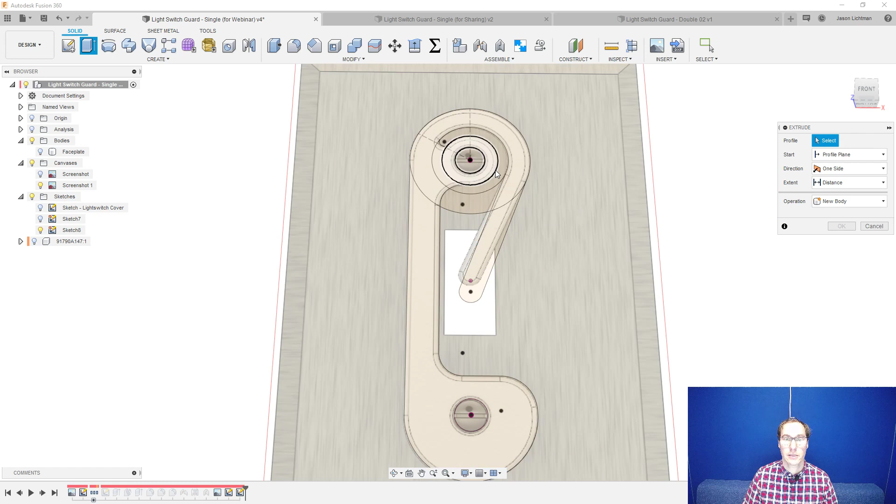And what you're going to find is that all of the different geometries that I added to my sketch are all going to show up as individual profiles. I can pick this region, I can pick this region, and I can pick each of these individually. And it would be up to me at this point to select what is important for my design. So in this case, I would choose these regions right here, and it would actually extrude exactly what I expected.

Let's show you that a little bit more firsthand. This is exactly what I expected. I mean, I extruded this too thick, of course, but this is what I would expect.

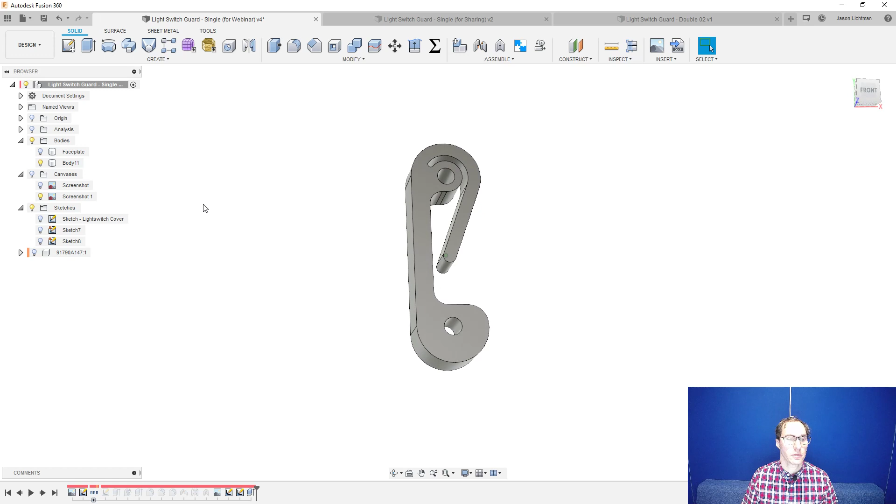And if you want, you can clean it up, and that would make your life easier. After all, when you go to extrude this, you do have to pick each of the individual profiles that you want to include until you get the right combo. If you'd like, however, you can go back and edit your sketch and trim it until it matches what you want. So I'm going to go and hit T for trim, and I have a choice here.

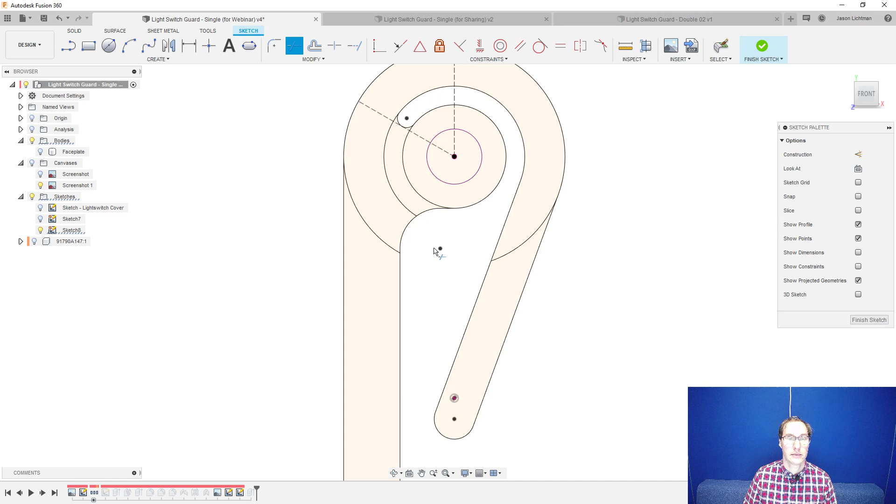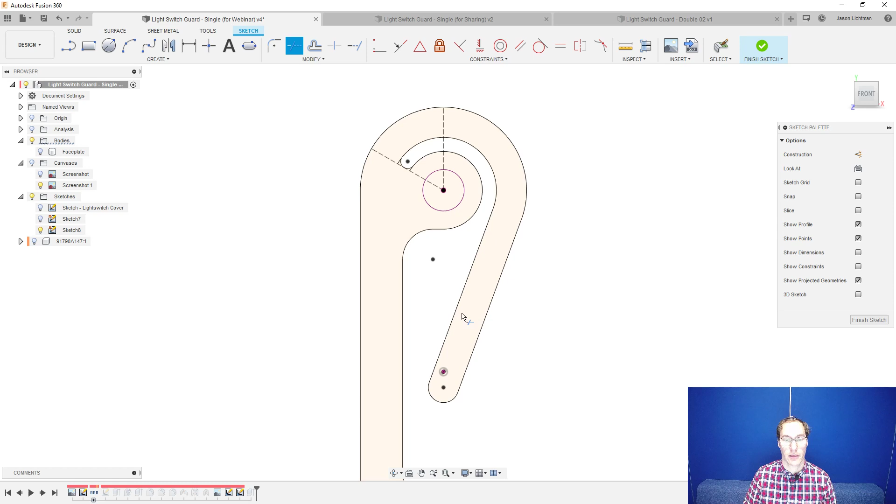I can hover over geometry until it shows red and select it until I get rid of everything that I want to get rid of, just like that. Oh, and also this one as well. Or let's go and undo that just a little bit. There we go. I could hit T for trim, and I could simply drag my mouse through each of these geometries until it matches what I want, just like that. Now I have a single profile, and it makes extruding even easier because I only have one profile to select.

Let's go and add a dimension to this, and we'll go with 5 millimeters. And this is looking much more realistic. And if you want to see this on the faceplate, here you can see the faceplate itself and then my extrusion. And this is looking pretty good, except if I put in my bolts, I don't think they're actually going to hold on to anything. I need to tweak this just a little bit.

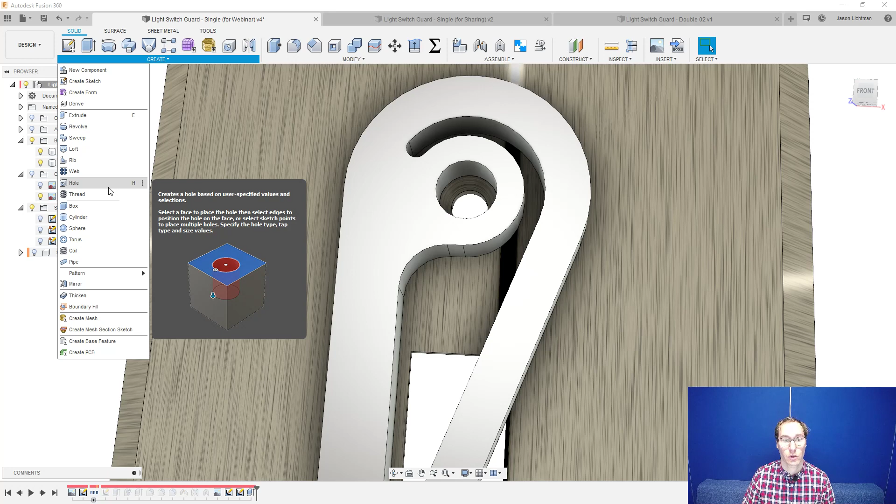So let's go and add some holes. And there are a couple of ways you could do this, by the way. I could have intentionally not put holes here, and then I could use our create hole. Where is that? Right there, or hit H for a shortcut. And by the way, if you ever can't find anything, hit the letter S for search, and you can just start to type in hole and then go into the hole command.

And here in the hole command, I could choose a variety of different types of holes, whether it's a simple hole or it's a counterbore or a countersink. And in this case, realistically, I do want a countersink, so I can go and choose a countersink. I could choose where I want it, and then all of my different dimensions.

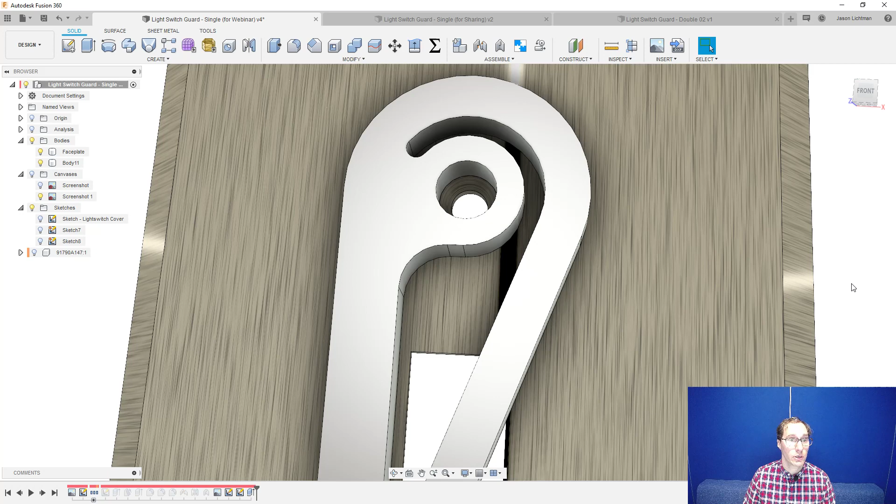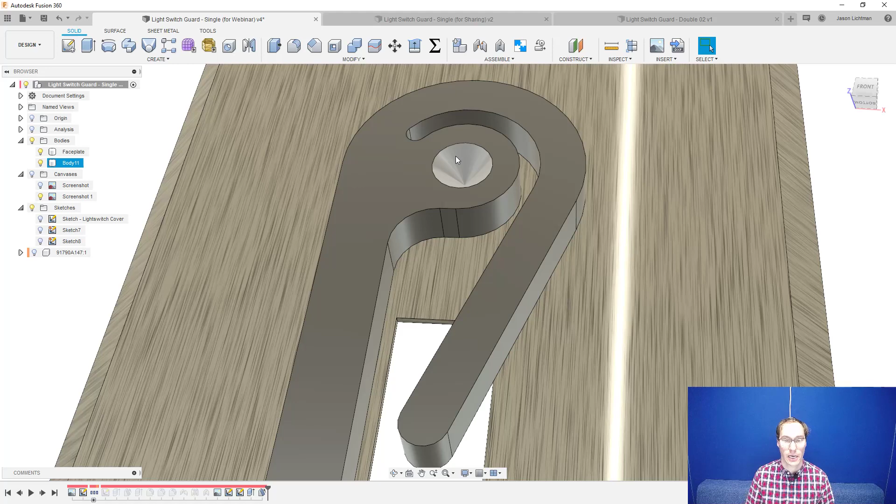Another way you could do this, in this case, is I could go and add draft, and we're going to go and choose this surface, this face, as well as this one. And we're going to go and add 45 degrees, hit OK, and now you can see that I have that drafted surface, or like that recess, but I still need to cut a hole through this as well.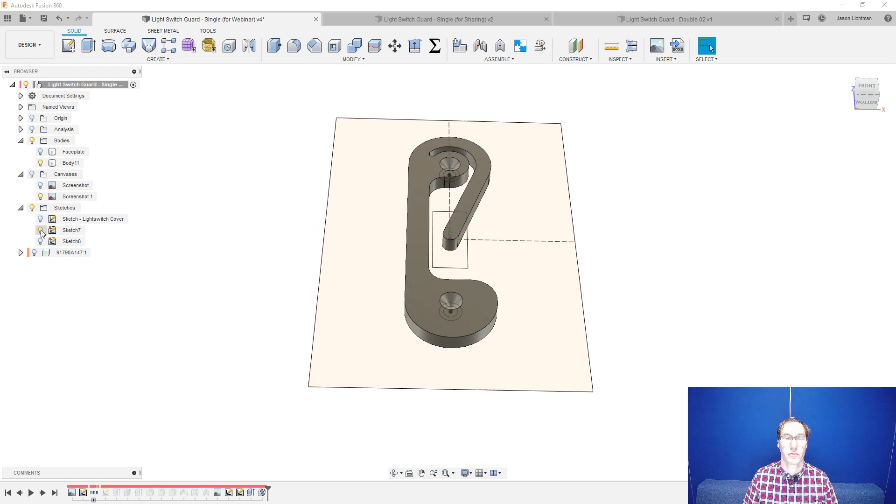So let's go and hide our faceplate, and we'll show our original sketch. And in that original sketch of the faceplate, we actually had two holes. We had the bigger hole for the size of the head of our screw, and then we also had the smaller one, which is the size of the hole that I need to make for that screw, for the threaded area. So we can go and hover over the back side and select these two regions, hit extrude,

and we can cut through our model. I could pick a distance, or to make sure that no matter what I do to change my model, it'll always work, I could say through all and make sure to cut my actual piece. And now this is looking fantastic. At this point, I think we're ready for fillets.

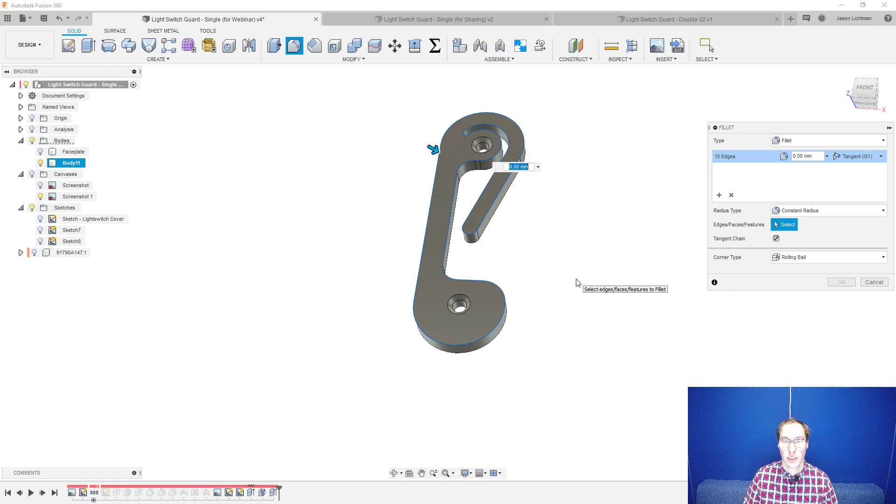So I'm going to go to Modify, Fillet. I could choose the top edge here, and I could drag my arrow until I'm happy with the size visually, or I could type in a value like 1 millimeter, and I'm good to go. I could do the same thing on this edge and this one. We're going to go and type in a value of 1.

And then I'm going to go and do this one last time over on this edge, and this time we're going to go and use 0.5 millimeter. And now this is looking really, really good. If I'm interested in 3D printing this right away so that I could see if this is going to work, I could simply go under Tools, Make a 3D Print, select the object that I want to 3D print, and all you have to do is make sure that your slicer is set up over here.

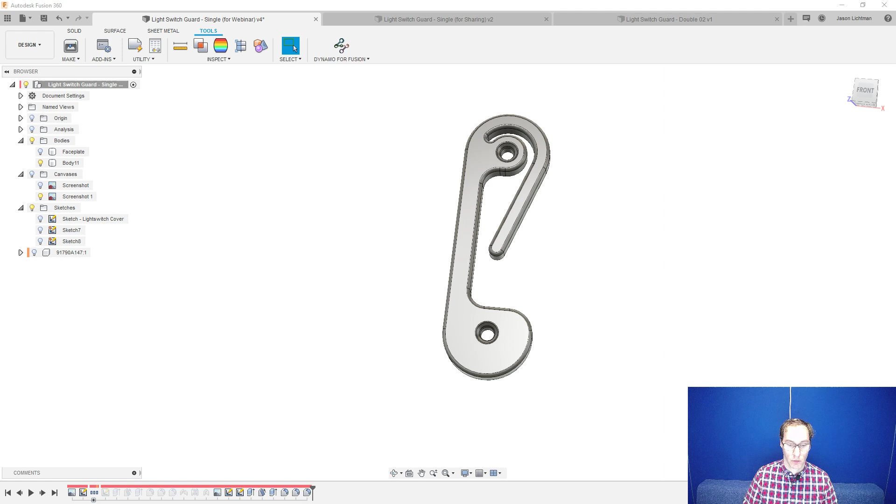Once you have it set up, all you have to do is hit OK, and your slicer is going to open. In this case, I'm using FlashForge Creator Pro. I have a FlashForge Creator Pro, and so I'm using the FlashPrint slicer, but I could also be using other software like Netfabb or anything else you want, Cura or whatever it is.

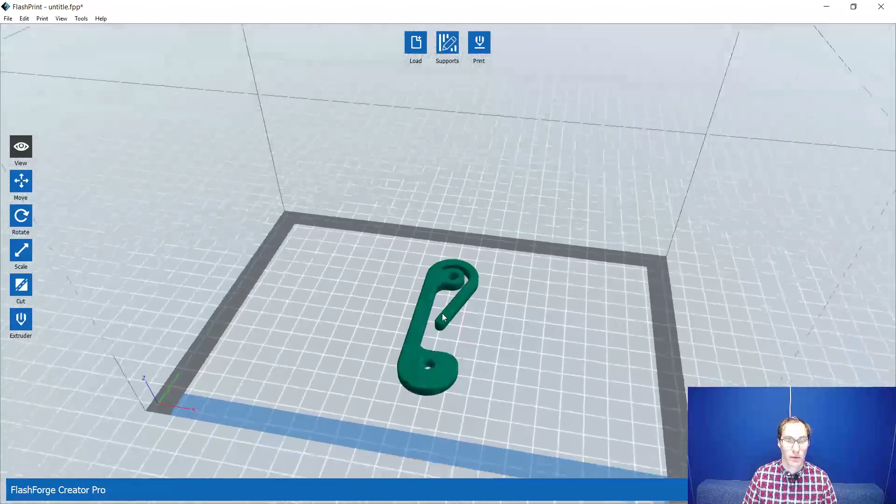And then here is where I'm going to go and choose the different settings I want. I don't have any overhangs on this particular design, so I don't have to worry about any kind of support material. All I'd have to do is go and choose the different options I want, whether I'm going to choose the temperature, the material, and just a little tip for you. I talked earlier about how there are different things in this design that will each affect the overall flexibility of your part. 2 of those things are found right here in your slicer, whichever slicer you happen to be using.

That's going to include your infill, like how dense is your part, because most 3D printed parts are not 100% solid. They're printed hollow on purpose, and how hollow the part is going to determine part of how strong it is or how flexible it is as well. So please make sure to pay attention to the fill density. I would say start with 15%, maybe work up to 20 if you want stiffer. 25 is pretty much my maximum. I don't really go above that.

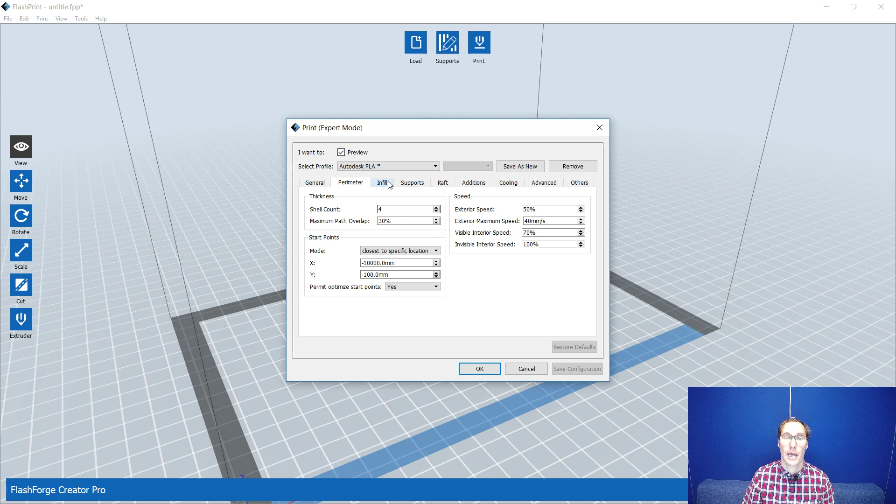And then also I would look at your perimeter. What your perimeter is going to do is define how many times your 3D printer is going to go around the perimeter and build a solid wall, because the outside is always going to be solid, it's the center that gets hollowed. In this case, I have 4 shells. I think the default with this slicer is 3, but you can change this from 3 to 4 or 5, whatever you want. The higher the number, the stiffer your part is going to be. So just keep in mind that you can change the shell count and you can change your infill density, and that will very much have an effect on the flexibility of your part.

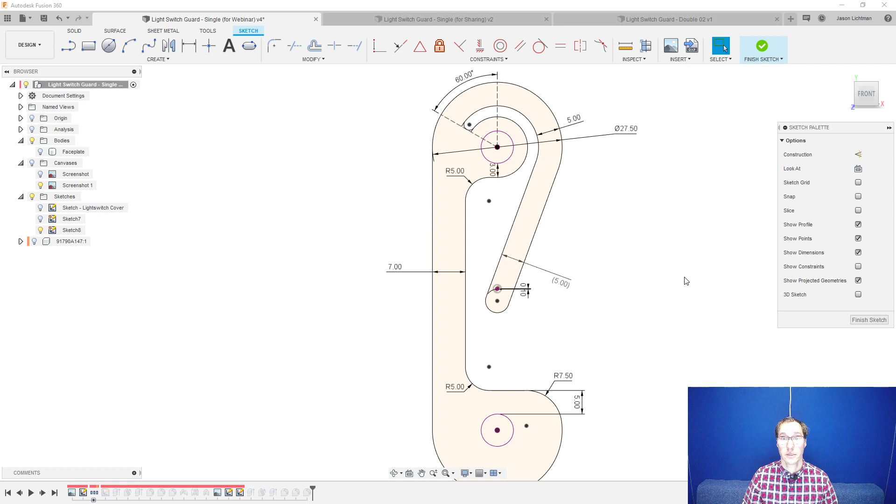Now let's go back into Fusion and let's talk about this part some more. The other things you can do to change the flexibility of this part would be to change the width of this region right here, and we set that to 5 millimeters. You can make that thinner if you want it to be more flexible, and of course wider to be more stiff. You can also change the overall height of your part. That was defined here under this extrude, and we set that to also be 5 millimeters. You can make this taller to be stiffer, or thinner to be more flexible.

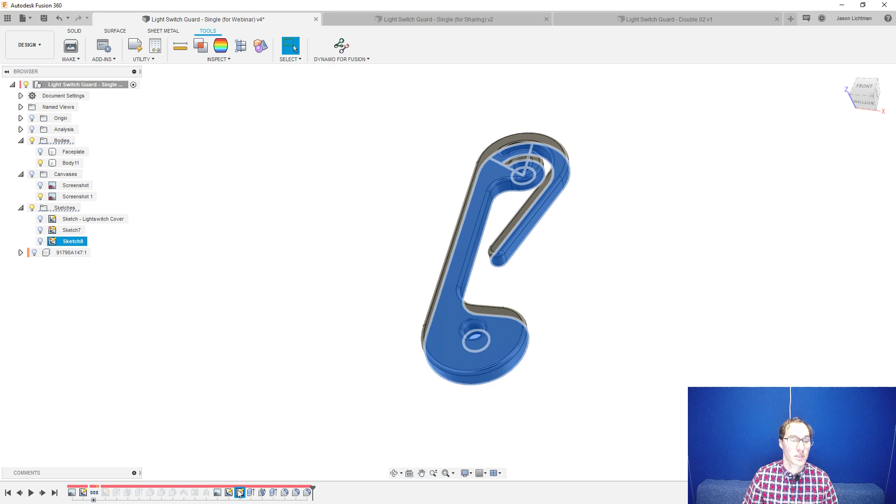You can also lastly go and change this pivot. If you look right over here, we define this at 60 degrees. Let's make this driven so I can modify this. Depending on where this particular flexing part ends, that will determine how much of this part is actually going to flex. So if you make this really small, all of the bending is happening in this region right here. And if you move this all the way over there, you're going to see more of the bending is happening here, but a lot of the bending is also going to be shared between all of the areas in between. So if you want your part to be stiffer, you can drag this over to the right, and if you want it to be more flexible, you can drag this over to the left.

But all of this at the end of the day is going to be up for you to play with and see what you like. In my opinion, the first thing you should do is design the part and 3D print it right away with whatever settings you'd like. Because no matter how much you want to nitpick your design in the computer, it's all about holding it in your hands. You can guess all you want about how stiff or not stiff this is going to be, but it's holding it in your hands that's going to tell you the answer. So my personal recommendation is to 3D print often, so that you get more feedback on your design.

So you 3D print it, based on what you see, you make a change, you 3D print it again. And I went through several of these until I got one that worked well. The dimensions that you see on the screen and have been on the screen this whole time, those are dimensions that have worked really well for me. But of course, you can change this however you want until you find something that works well for you.

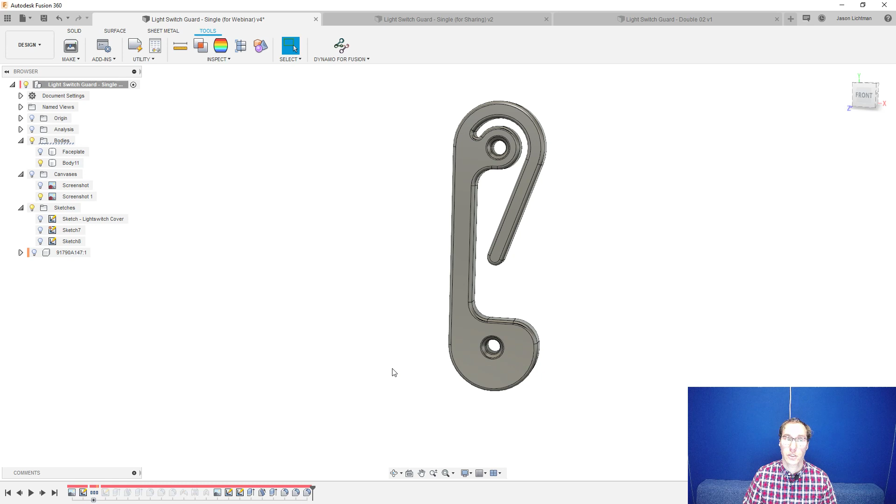But when you're done, you should end up with a piece that looks something like this. Feel free to change this however you'd like. And this is what it looks like on the faceplate. And feel free to change the design not only for aesthetics, but if you have another way to make this more functional, please do that. I have one example for you.

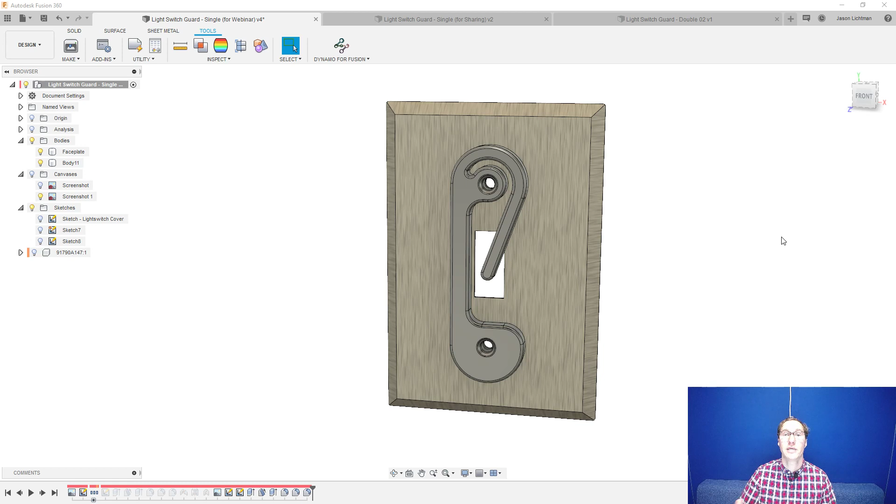And this double guard is going to prevent the switch from turning on when you don't want it to, and off. Basically, whichever way it's already right now, it's going to stay that way unless you bend the arm out of position, right? A toddler couldn't do it, but an adult, of course, can.

One thing to keep in mind with plastics is that plastics, when you put them under a load or a force for an extended period of time, they will end up doing something called creep or creeping. And what that means is that they become accustomed to being in that shape and they don't want to flex back to the original position.

So what I found very quickly when I made this double guard is that if I had the light switch up on a regular basis, then the guard that would be bending out of the way, this top one in this case, would stay off all over to the side. And then when I moved that light switch down, it didn't actually work anymore. And conversely, when I had light switches that were down all the time, basically one of these two arms would always not work. So keep in mind, it's all about experimenting.

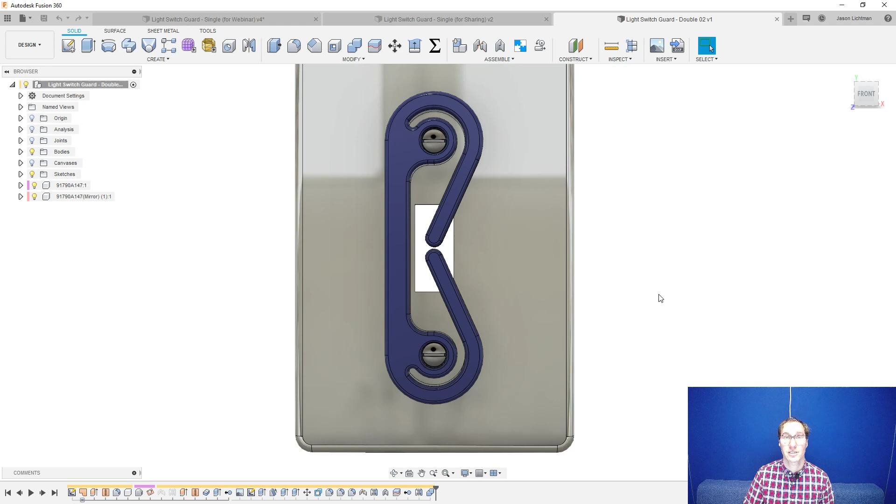Even someone like myself, I know Fusion 360 really well, and yet I'm learning something every time I design. So this was a complete failure. I do not recommend the double guard, but the single is absolutely perfect.